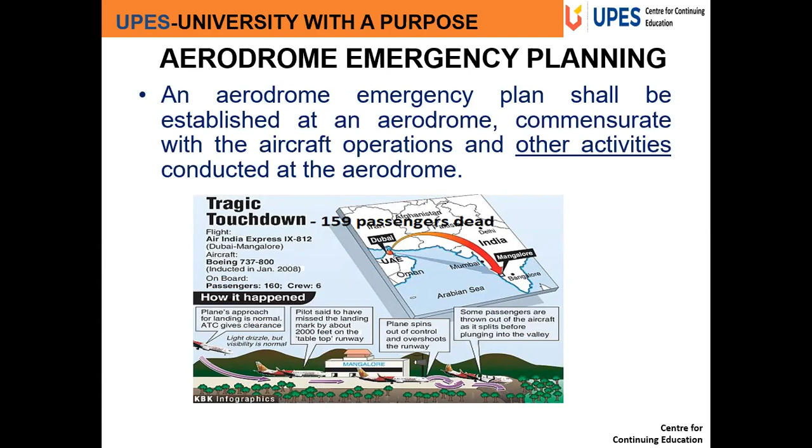Now, what are the types of emergencies that are required to be known about? So, aircraft emergencies by itself. There can be many aircraft emergencies, fire or abnormal landing emergency or anything. Sabotage, including bomb threats, then unlawfully seized aircraft, dangerous goods occurrences, building fires in the aerodrome, natural disasters, and then public health emergencies. These are the different types of emergencies for which we have to cater, not only for aircraft emergencies.

Now, this aerodrome emergency plan document shall include at least the following: types of emergencies planned, agencies involved in the plan, responsibilities and roles of each agency, the emergency operations center and the command post for each type of emergency. This will come as part of the responsibilities. Information on names and telephone numbers of offices or people to be contacted in case of a particular emergency, and a grid map of aerodrome and its immediate vicinity. All these are required to be included in the aerodrome emergency plan document.

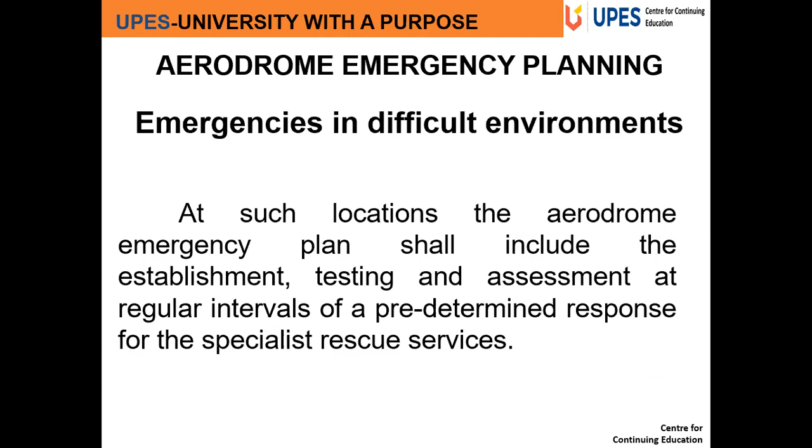At such locations, that is, the difficult environments, the aerodrome emergency plan shall include the establishment, testing, and assessment at regular intervals of a predetermined response of the specialist rescue service. Because at such difficult environments, special rescue services will be required, like the Coast Guard or such.

Now, what is the level of protection and extinguishing media that is required at an aerodrome? So this will depend on the topics that are listed. That is, it will depend on the aerodrome category, the level of protection that needs to be provided, the principal and complementary extinguishing agents that are required, minimum usable amounts of extinguishing agents that are required, and reserve stock.

Now, how do we categorize an airport? The airport is categorized based on the types and size of aircraft operating at the aerodrome. So, category 1 is an aerodrome where the overall length of the aeroplane does not exceed 9 meters, and with a maximum fuselage width of 2 meters. That is small aircraft. Category 2 is 9 to 12 meters aeroplane overall length, and has maximum fuselage width 2 meters.

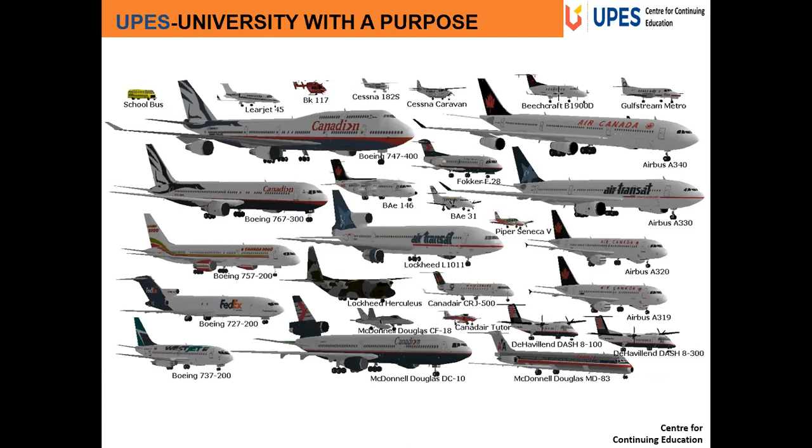Now the aerodrome category shall be determined from the table that we saw just now and shall be based on the longest aeroplanes normally using the aerodrome with their fuselage width, except that where the number of movements of aeroplanes in the highest category normally using the aerodrome is less than 700 in the busiest consecutive 3 months, the level of protection provided shall not be less than one category below the determined category.

So slightly confusing jargon, but what it means is the highest category of aircraft that we find, and we say that this will be the highest category of aerodrome.

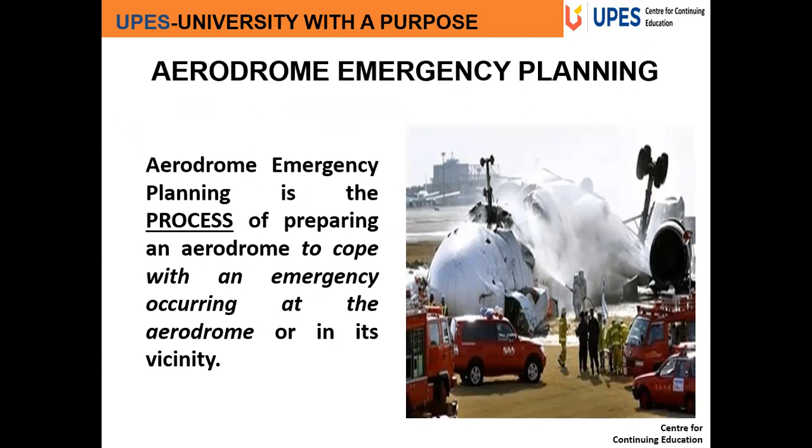So before concluding, let us go through once again what we saw in short time. Just a review of what we saw today. Airport rescue and firefighting is given in chapter 9 of ICAO Annex 14. Today we talked of types of emergency, the emergency operations center, the command post, communication systems, exercises, and emergencies in difficult environments. Planning is required to ensure that when the actual emergency takes place, there are not many problems.

Types of emergencies: not only aircraft emergencies, but sabotage, unlawfully seized aircraft, dangerous goods, building fires, natural disasters, public health emergencies. We have not discussed the other things because they are not exactly the problems of aerodrome rescue and firefighting teams. There are other people like civil police and civil administration involved in those, so we will not discuss them. The plan should indicate types of emergencies and agencies involved in the plan.

These are the aerodrome emergencies. On the aerodrome, agencies involved are ATC, ARFF, operator, security, police, aerodrome administration, medical. And for off-aerodrome emergencies, Coast Guard, City Fire Department, police, health, and military. The communication between the emergency operations center, command post, and participant agencies is essential and should be maintained.

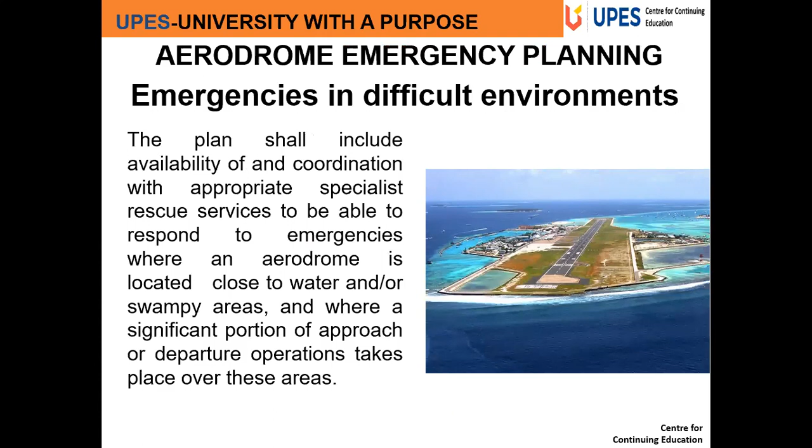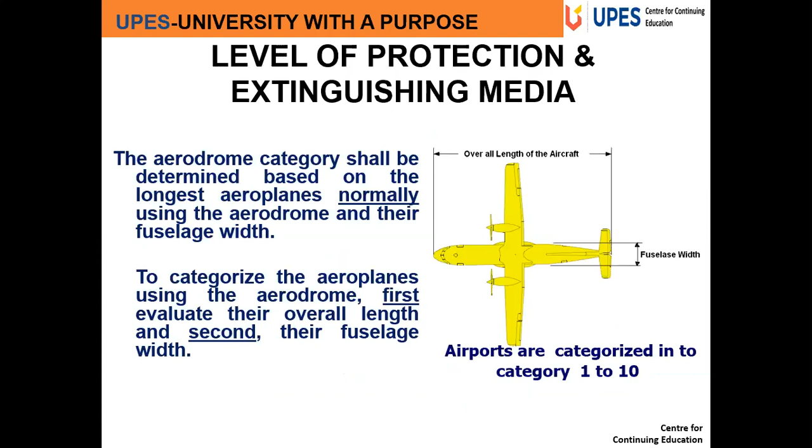We have talked about the level of protection and extinguishing media for the runway firefighting vehicles. This depends on the category of the aerodrome, depending on the size of the aircraft. As we saw, airports are categorized in categories 1 to 10, depending on the size, and this is based on the longest aeroplanes normally using the aerodrome.

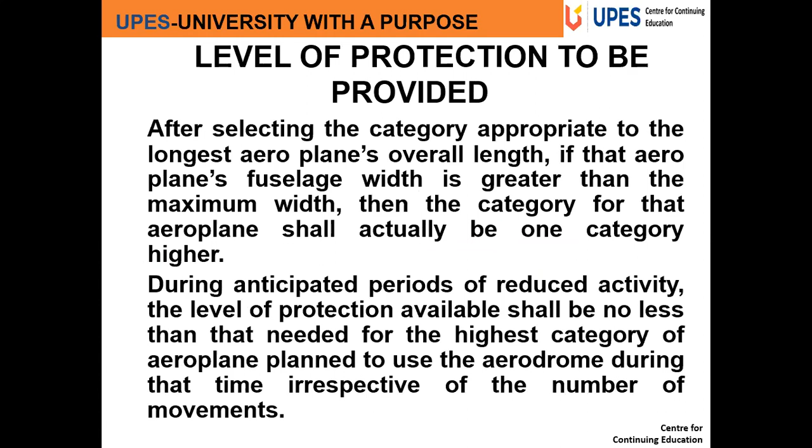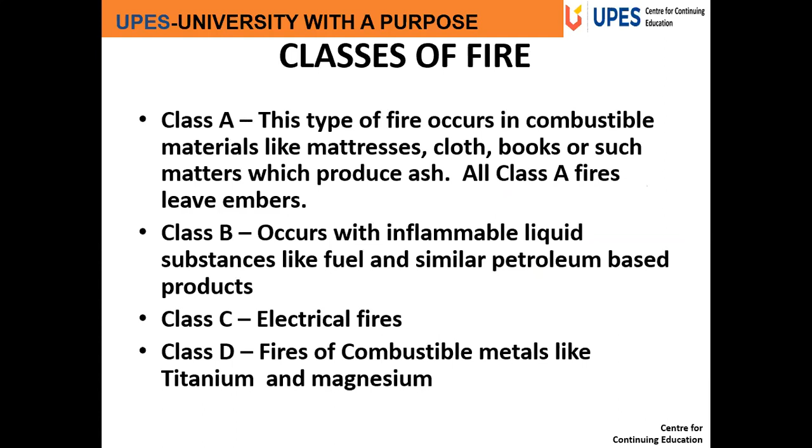What is fire, as we saw? It's a chemical reaction and it can be controlled by eliminating oxygen, heat, or fuel. The different classes of fire: Class A, material; Class B, fuel; Class C, electrical fire; Class D, combustible metals like titanium and magnesium. The extinguishing agents: water, AFFF (aqueous film forming foam), carbon dioxide, halon, potassium bicarbonate.

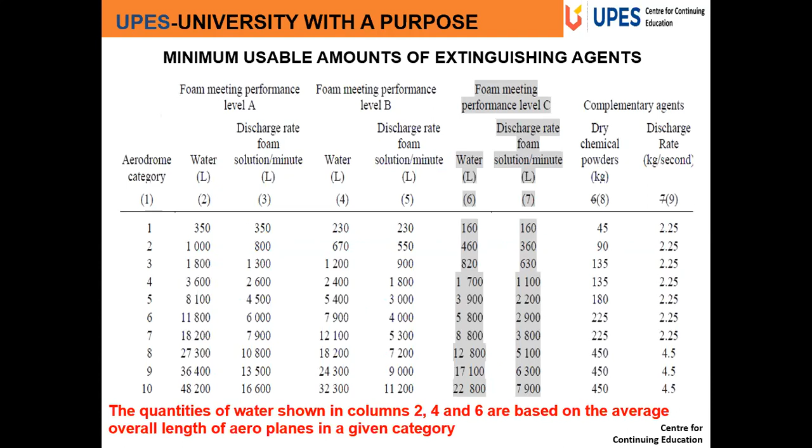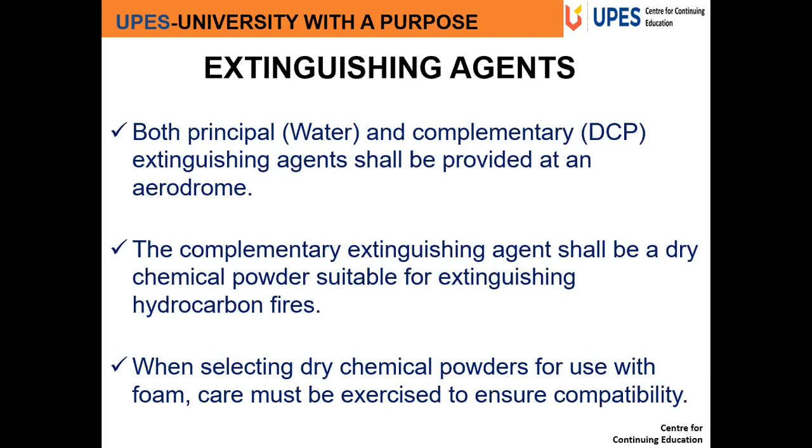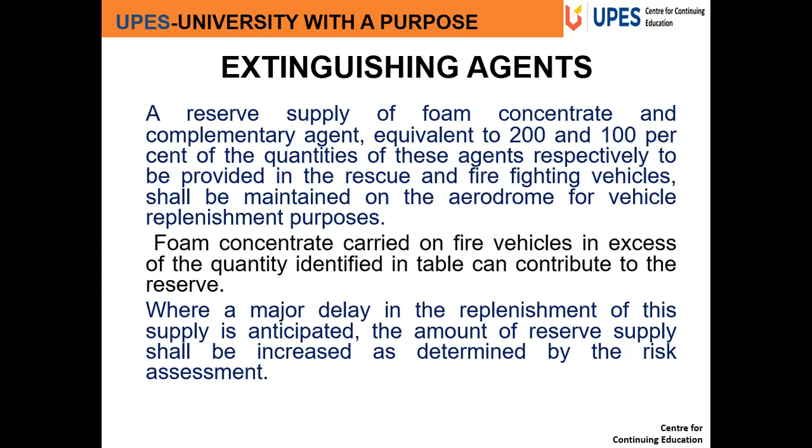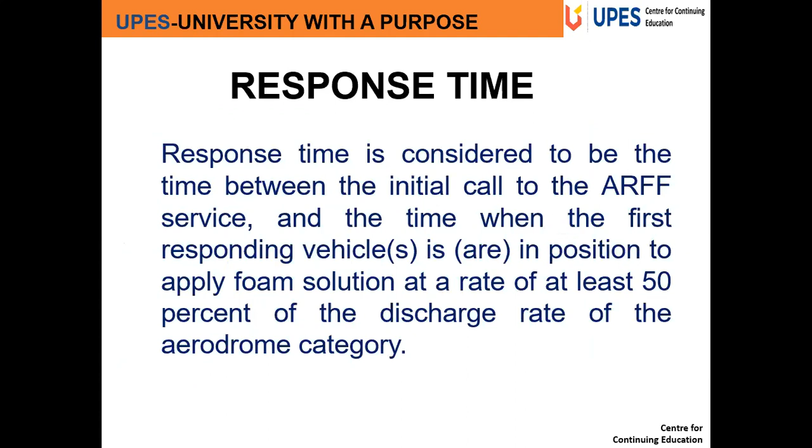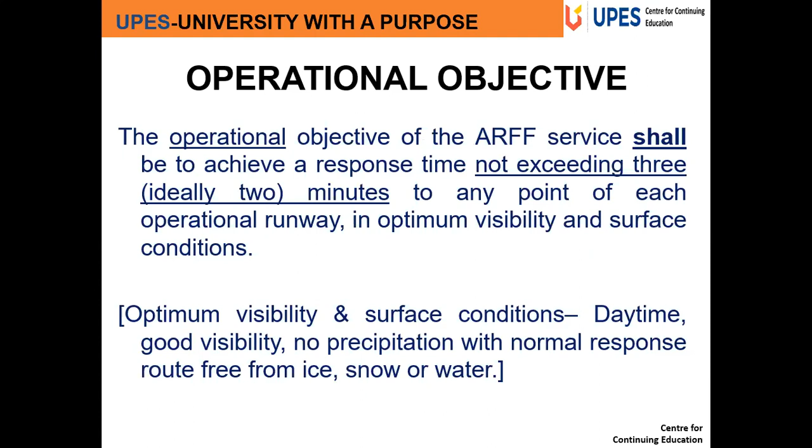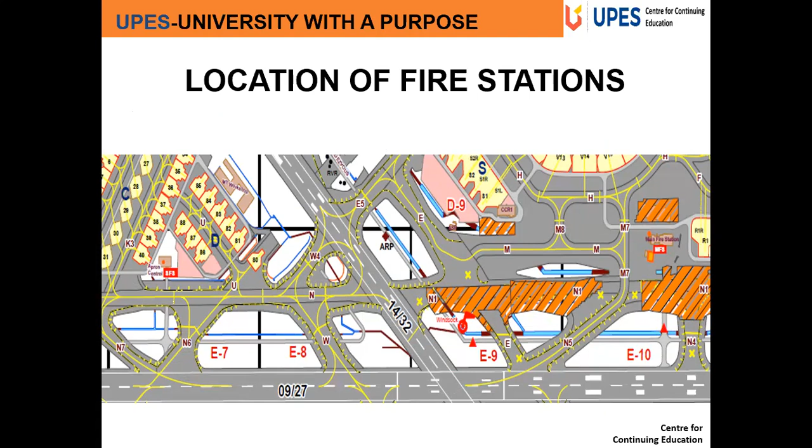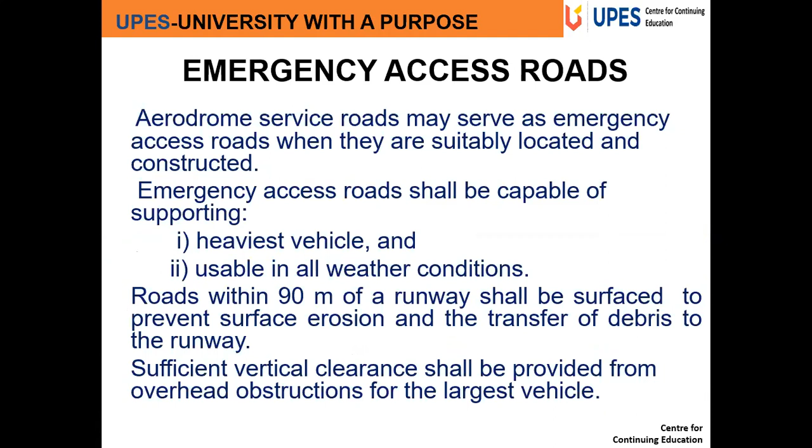The operational objective of the ARFF: response time should be not more than 3, ideally 2 minutes. All this firefighting equipment should be provided at the aerodrome depending on the category of aircraft, and there should be adequate fire stations, once again depending on the size of the aerodrome. Locations of fire stations at different places. Access roads for the runway, the types of access roads that need to be provided and their capacity.

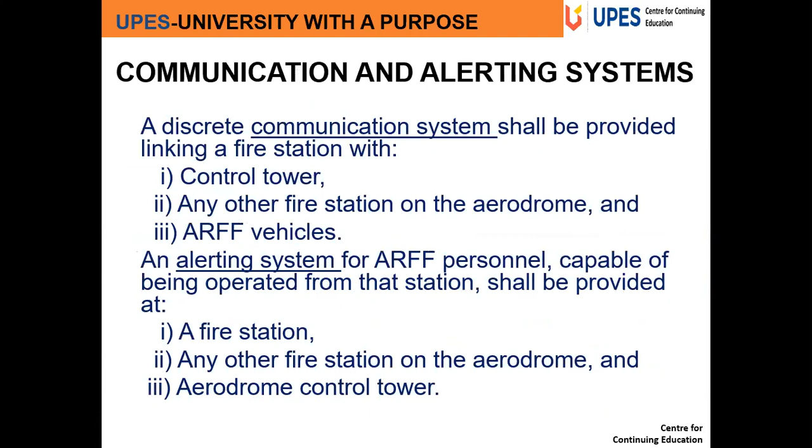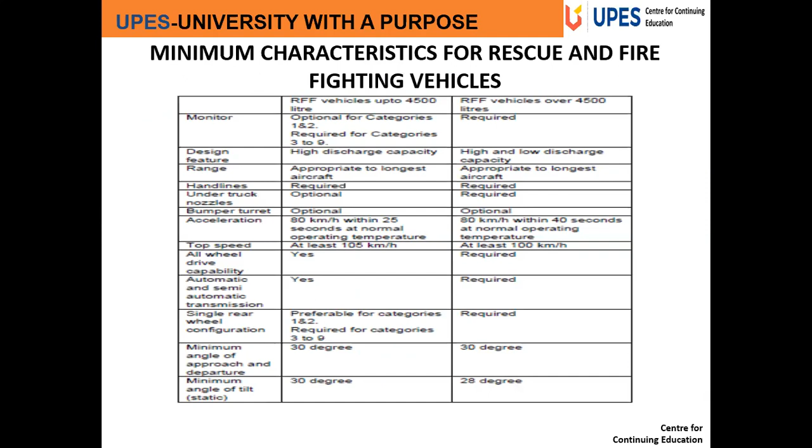The communication system for internal communication as well as the alerting system from the tower. Number of firefighting vehicles that should be provided depending on the category of the aerodrome. Characteristics, speeds, and other capacities of the firefighting vehicles. Then training of the ARFF personnel is necessary. The minimum number of people required has to be calculated, and they should be available on each vehicle. They should have adequate protective clothing and sufficient rescue equipment.

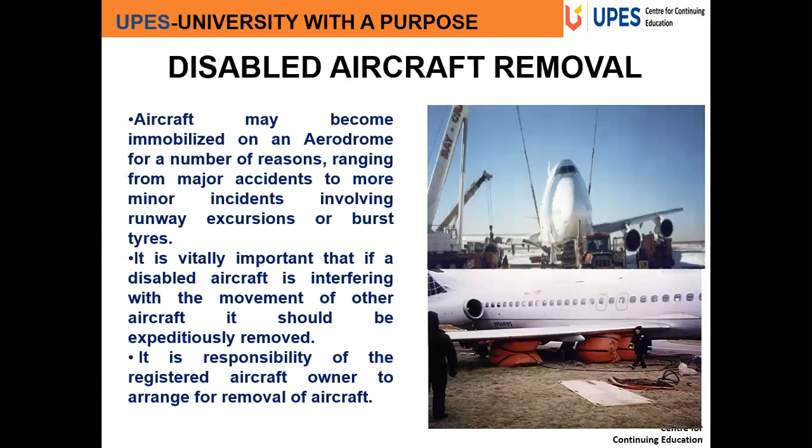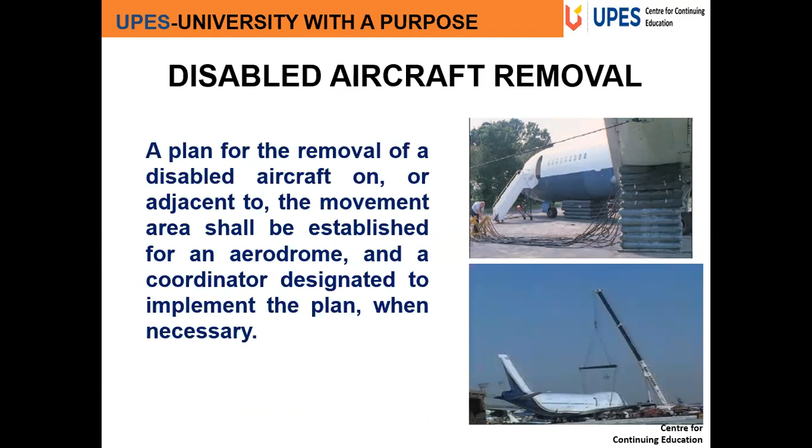Also, as we saw, there is a requirement of disabled aircraft removal to continue operations at the aerodrome. Various equipment is required: cranes, airbags. And water rescue operations, as we saw, are necessary.